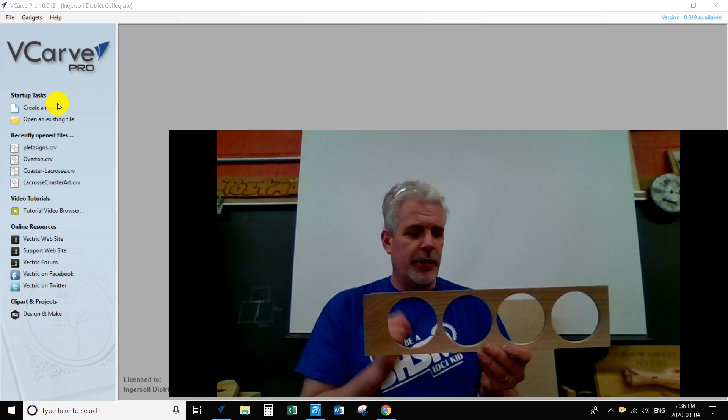Now, I've selected my material, and I want to show you a different process here as well. Behind me is what we're going to use as a spoil board, and I've noted that the spoil board is 11/16 thick. We're going to pin the material using a headless pinner to the bottom left-hand corner as our datum point for starting. The reason is that our machine has a vacuum bed, and it doesn't hold well with solid wood and thin pieces like this. So instead, we pin the material down using a 23 gauge nailer in the corner, and you can see where students have run it.

We just reuse these sacrificial spoil boards and let the material cut through. This is also where our thickness comes from. We need 11/16 for the spoil board, so we're going to fool the machine: 11/16 plus a 3/8 board. We're going to put in a piece at 1 1/16 thick as our material for this project.

So we're going to open up Vcarve now and work through this project. You can create anything you'd like, whether text or a JPEG, that's completely up to you. I'm going to start a new file, and we'll input our number 17, because we're only doing a set of 4. Again, if you're doing one for me here in class, please use 22 so you can fit 5 coasters on the page. We're going to use a board 1 1/16, so we need the decimal equivalent, which is 1.0625 to get us the number.

We're referencing off the machine bed, XY datum in the bottom left, and we're using standard resolution. So our discs here are going to be a 3.5-inch circle. So we're just going to draw a circle, diameter 3.5, create, and there is going to be my coaster. And this is a review of commands that you've used before, so we're just going to move rather quickly here.

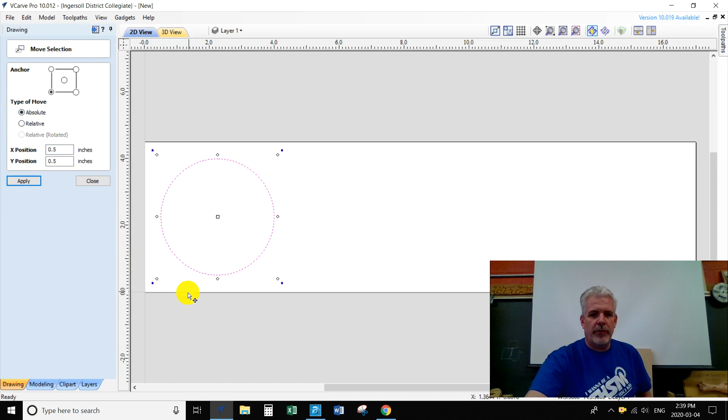We want to create a logo, and for this one here I'm just going to do something simple. Again, please use text, use any of the skills that you've learned so far. I'm going to do IDCI, and you can see my text is kind of small, so why don't we change this to 1 inch. And again, you know how to change fonts, you know how to move all sorts of things. So some other neat features: I want to put this IDCI in the center of the circle. So we've learned already that if I try to select this circle, I lose my IDCI.

So when you select one and you want to select something else, you're going to hold down the Shift key, select this one here, and we're going to choose this center button. And we're going to use something different here where we can space it inside our last vector selection. So I'm going to say to center this way and center that way. And so now my IDCI is sitting right there in the center.

Now I just guessed there for size. Again, if you're not happy with the size, you can adjust this. Again, review of features here. We can use our set size function here. And maybe I will turn this to around 2.5 inches so it sits just inside. And I'm ready to go.

This is ready for carving, but we're going to do another process here called array because I want multiple. So once I've laid out one and have it perfect, down here on the bottom I've got my offset command we've used, I've got my array command. And it can be kind of a tricky one to figure out, but if you look at the way these things are going, it allows you to create a selection of something. So I want to create 4 columns. I'm going to change that to 1 row and increase this to 4 columns.

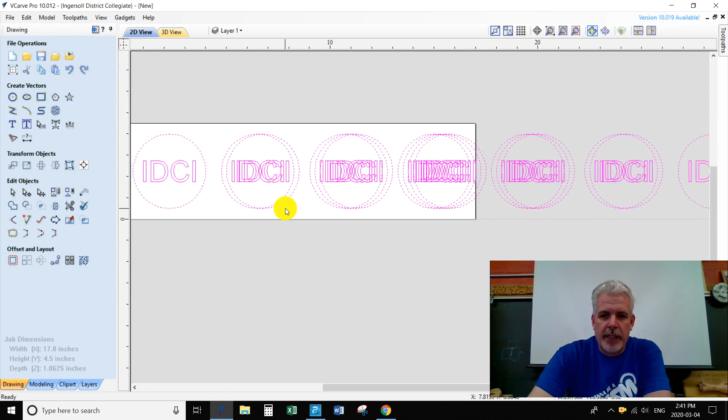And there's a messy feature. You can see because I had it selected, I've got all sorts of duplicates here. So I'm going to erase these, zoom back in, select my fonts here, and try my offset here.

And you can see I just fit inside there, so that doesn't look too bad. Okay, I probably can tighten that up still a little bit. So we're going to go back here and say undo. And let's just close this to 4.125. See how that looks. That looks great. Okay. So we're ready to program here.

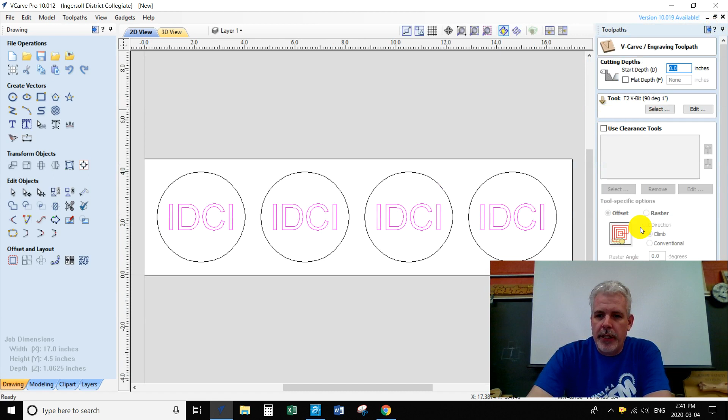This is all review here. I'm going to engrave my lettering first. So I select my lettering, pin down my board here, choose my V-carve selection. I'm going to turn myself off here and work my way through the selection. So we're going to choose a 90-degree cutter. Sounds perfect. We're going to not need an area clearance tool. And we're going to say calculate.

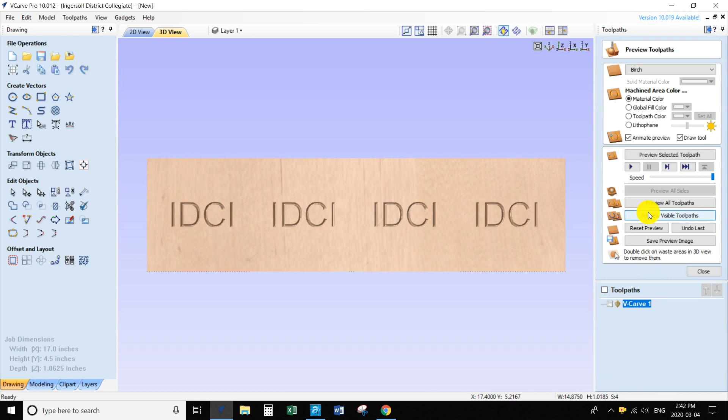Okay, let's preview all visibles. So I'm going to get my IDCI logo, which looks great. And now we're going to profile. So I'm going to select these again, holding the shift key down, selecting each of my circles. And we're going to use the profile. And we are going to cut 0.375 all the way through.

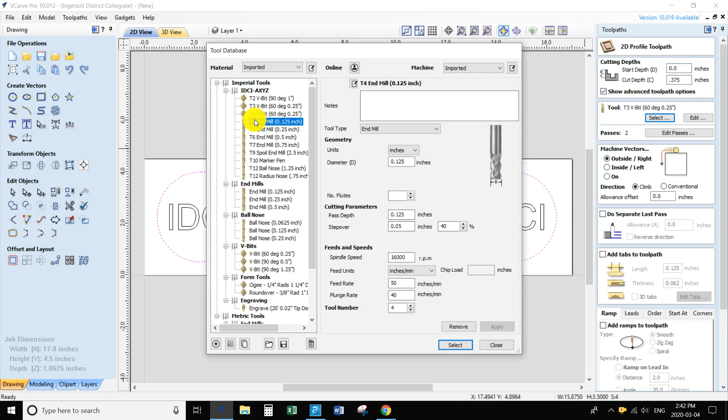We want to use a small cutter. I would recommend the 1/8 inch end mill because it will do a nice job. Doesn't remove too much material and leaves a nice finish. And we want to stay outside the line, so that's perfect. We're going to climb cut, and we're not going to bother with separate passes on this one, but we are going to add tabs. So this is a new feature, and you can set the tabs.

I would suggest 0.25. What this is going to do is connect the coaster to the material so that it doesn't come out. And I'm going to say that it's going to be 0.125. So we're going to challenge you a little bit here with decimal equivalencies. 0.125 equals 1/8 of an inch. So you can check the chart on the wall if you're trying to match up things.

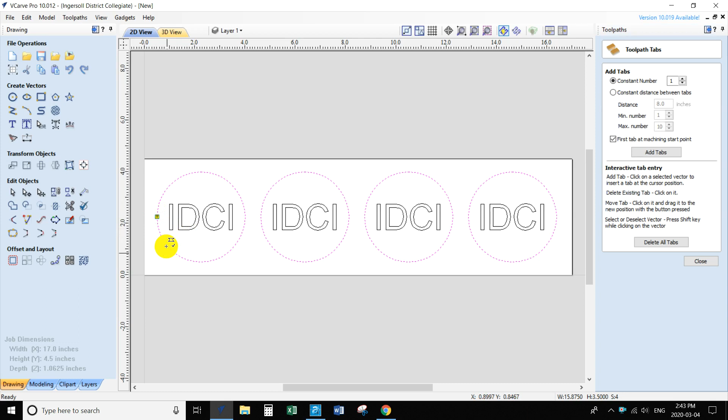We're going to choose edit tabs here. And it will do this automatically, but I like this feature where I can connect. And so I just click and you'll see it adds a T for a tab. So I'm just going to add a tab to both sides of these. And we're doing this for the reason of making sure the coasters don't come disconnected because they can jam up in the hood of the machine, which can damage the machine.

But it also allows us, if we've made a mistake, we can run these through a thicknessing sander and change the thickness of our materials or sand them both sides with a palm sander. Much easier to sand them while they're still attached. And then we just snap off the tabs and finish the unit. So that's ready to go.

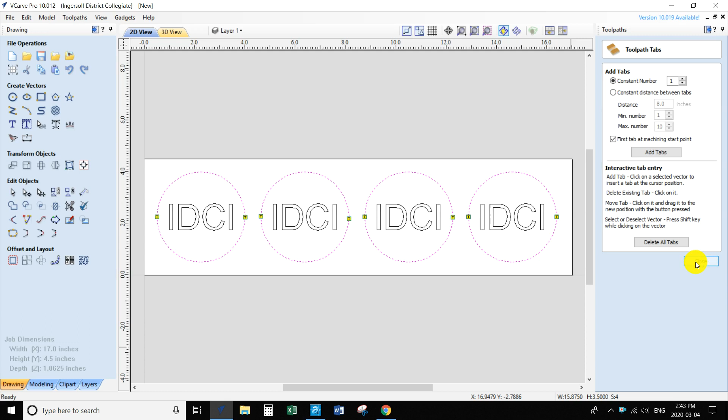So I'm going to choose close. We'd like to use a ramp cut. Again, it extends the life of our tooling, so a 2 inch, let's say 3 inches is good, so that it comes in on a nice smooth angle, and we're ready to calculate. So these are essentially finished. Let's run our preview so you can see what we've got.

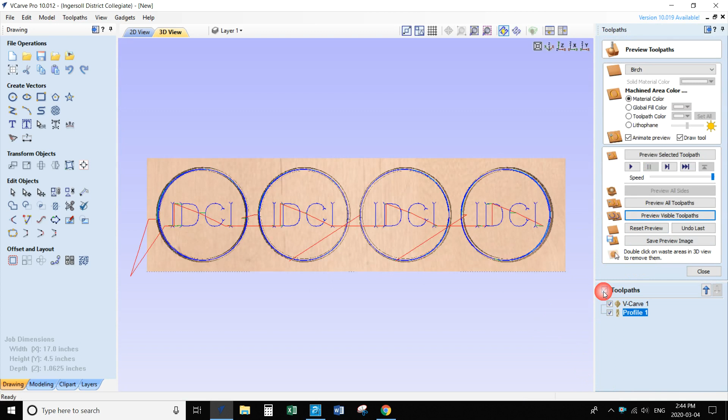Okay, so there's my tool path for my profile, and we're going to run all tool paths here, and you can see the text. So I'm going to carve my V-carving first, and if you zoom in here, you can see the tabs, the little portion that's been left behind to connect those. And this is ready now to export to the machine. So we're going to close this.

And again, please run a job summary so that we can take a look at all of your features. It will give you a chance to see the time and function. And we're ready to click Save Tool Path and post that to the stick to use. So I hope you enjoy this, and it's a good opportunity for you to customize and create a unique coaster for you while learning some new functions.

So the focus here again is going to be on thin materials. So you're going to be breaking out a piece at 17 by 4.5 by 3/8, and that material will be used for your project. Again, if you're running one for me as an extra, please run one at 22 by 4.5 by 3/8 so that we can save one for the class. Enjoy and have a wonderful time making coasters.